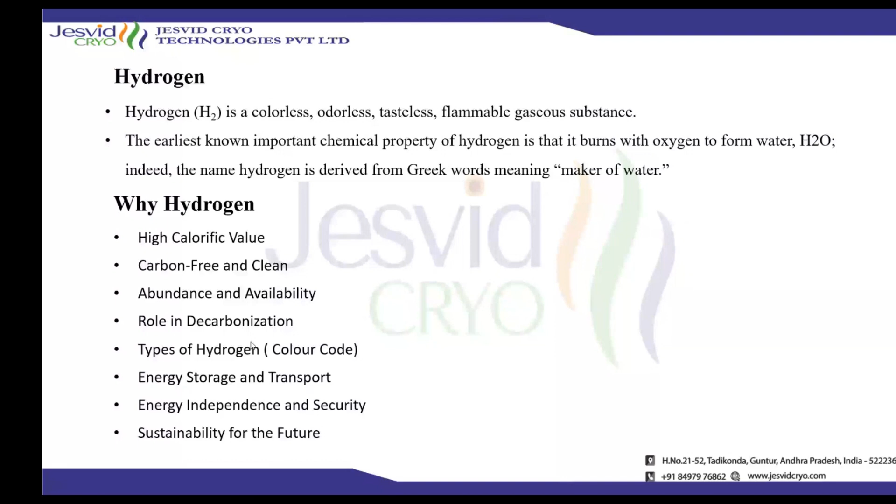If we see the applications of hydrogen, we all think hydrogen is used only in the transportation sector or some refineries. But various sectors and industries are using hydrogen, mainly the refineries. Refineries were once the largest producers of hydrogen, but now due to the decarbonization motive, they are the largest consumers of hydrogen for decarbonizing their products.

And in the refineries, mainly oil refineries, we are using hydrogen for desulfurization or denitrogenation, where hydrogen is mixed with the sulfur and this is separated. Only the pure petroleum gases are produced.

And in chemical industries, we are generating ammonia. As per the records, in the next 30 years, ammonia consumption is going to increase 40%. At present, 1.8% of carbon is being generated from ammonia. So here, using the Haber-Bosch process, hydrogen can be mixed with nitrogen, which is generated using air separation, to reduce the carbon. So hydrogen along with nitrogen gives ammonia, which does not generate any carbon.

Next, the steel industry. Making steel requires high temperature, and this high temperature is obtained by using coal. Burning the coal gives the high temperature which makes the steel, but the steel making process also releases carbon. So if we replace the coal with hydrogen, the high temperature is achieved, as hydrogen has a higher calorific value, and also there is no carbon.

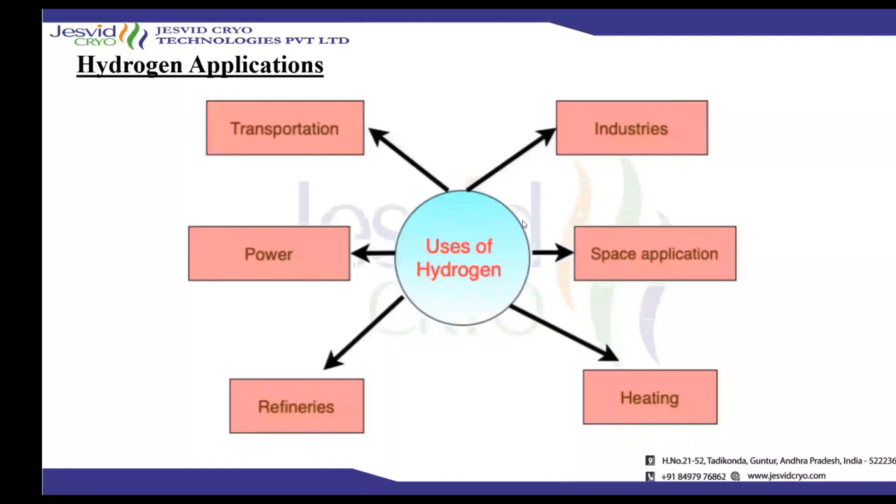If you see the supply and demand of hydrogen, 90 metric tons of hydrogen is the global demand across all areas. This hydrogen is produced from different sources such as natural gas, coal, fossil fuels, oils, and other byproducts. Here, 59% is produced from natural gas. This is not actually green hydrogen; it is produced from natural gas, which has carbon content.

Likewise, 19% from coal, 0.7% from fossil fuels, 0.6% from oils, and 21% from H2 byproducts. The hydrogen produced from natural gas or coal has some byproducts, and these byproducts also contain hydrogen, which comes to around 21%. So this is the supply of the 90 metric tons of global demand from fossil fuels and renewable energy sources.

Of this 90 metric tons, 37.18 metric tons is used purely in the refineries. 59% of hydrogen comes mostly from natural gas, and 37.18 metric tons goes to the refineries for the hydrodesulfurization process and various processes to reduce carbon emissions. In the other industries, as I mentioned, chemical and iron industries, 46 metric tons of hydrogen is used in the chemical industries: 75% for ammonia synthesis and 25% for methanol production.

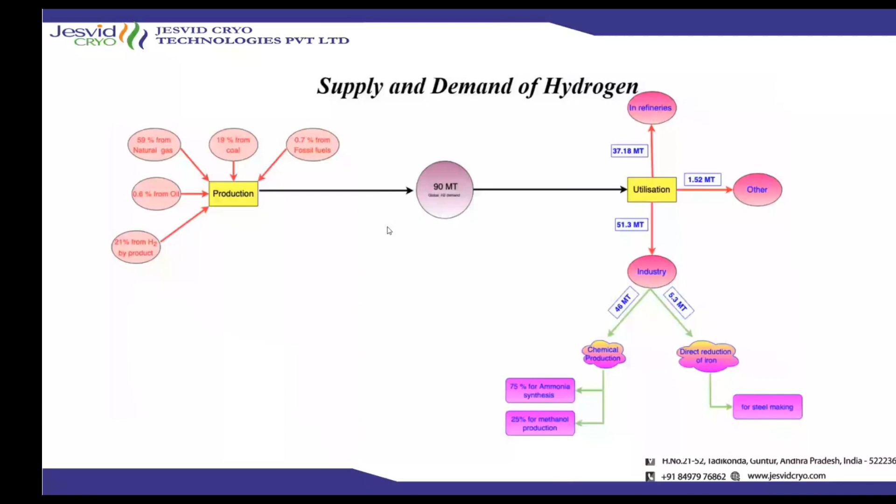Along with this, it is also consumed in the steel making process, where 5.3 metric tons of hydrogen is used in steel making, and the remaining 1.52 metric tons is used in other areas, such as transportation and other things. So we can see here the total supply and demand of hydrogen.

In the earlier slide, we saw that hydrogen is generated from natural gas, oil, and coal in these percentages. But how have the production methods been categorized? They are categorized in different ways; let us see the processes. Reforming, partial oxidation, and autothermal reforming are some of the processes listed here which generate hydrogen. If you read this slide, hydrogen generated using the reforming process has a feedstock of natural gas, and that feedstock source is fossil fuels. So this is the way we categorize hydrogen production methods.

Hydrogen production methods can be categorized by the source of the feedstock, the type of the feedstock, and the process implemented to generate hydrogen. There are different methods based on thermodynamics, like whether you are giving energy or taking out energy to generate hydrogen. And if you are using a catalyst to make the reaction happen, there are two types of reactions: catalytic and non-catalytic. Another way to categorize hydrogen production methods is the oxidants.

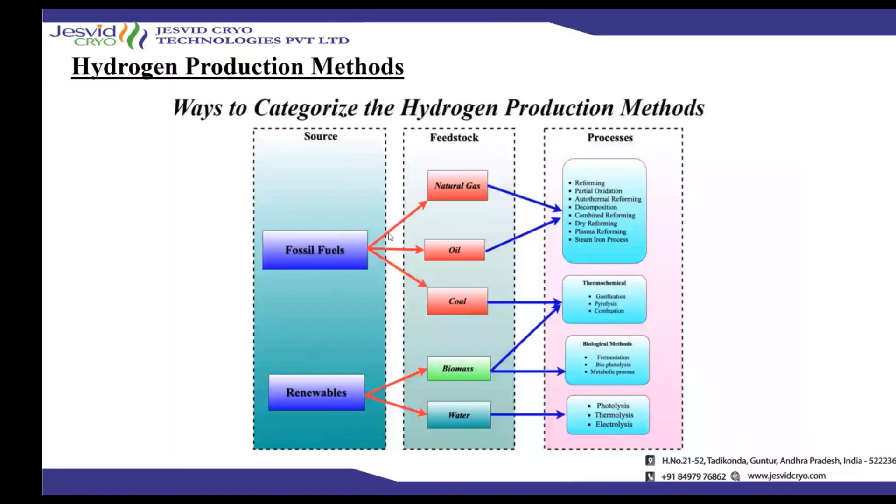So as I mentioned, the type of hydrogen color, here is the hydrogen color wheel. If we compare this hydrogen color wheel from earlier to now, it is going to increase. As we are very much interested in green hydrogen, we can start with green hydrogen. The green color indicates that you are generating hydrogen using water electrolysis along with a renewable source of electricity. That means you are using renewable electricity to split the water into hydrogen and oxygen, then the generated hydrogen is called green hydrogen.

And if you are using any renewable energy such as solar power or wind power, that can be green hydrogen. And if you are restricting only specifically to solar power to split water into hydrogen and oxygen, then this is called yellow hydrogen. And if you are using nuclear power to split water into hydrogen and oxygen, then that can be called red, pink, or purple.

For example, if you are using a nuclear power plant to generate electricity, and that electricity is used to split the water, then it is called pink hydrogen. If you are using direct nuclear power to split the water, then it is called red hydrogen.

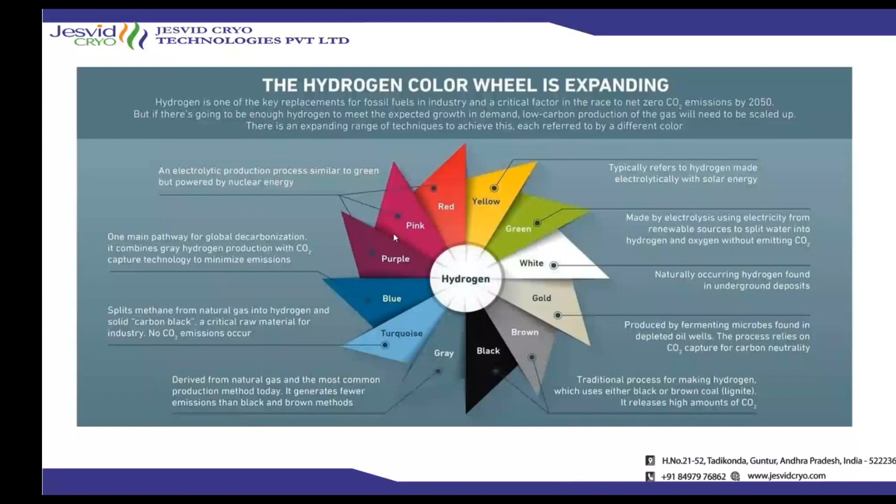So we have studied the hydrogen color spectrum and the different hydrogen production sources, and we know that during production of hydrogen, carbon is emitted. So here there is a comparison of the energy consumption, hydrogen yield, and emissions while generating hydrogen. If you see the feedstock, I have taken natural gas, oil products, coal, and water as the feedstocks.

If I want to generate hydrogen using natural gas, 1 mole of hydrogen requires 42 kilojoules of energy. And if you are giving 1 mole of feed, it can generate 4 moles of H2 using natural gas as a feed. If you are generating 4 moles of H2 giving 1 mole feed of natural gas, you are generating 10 tons of CO2 per 1 ton of H2. So if you are generating 1 ton of H2 with natural gas as a feedstock, you are generating 10 tons of CO2. So this is a major comparison.

We have already seen that the major hydrogen production is done using natural gas. So here the carbon dioxide released to the atmosphere is high. So we are shifting towards carbon neutral environments, so we are preferring the water electrolysis technologies.

Now for the oil products, the energy consumption is 50 kilojoules per mole. So to generate hydrogen, we require 50 kilojoules per mole of energy for an oil product as a feedstock. And with 1 mole of oil product as a feed, we are able to generate 2.7 moles of H2. And if you are generating 1 ton of H2 using oil products, you are releasing 12 tons of CO2, which is higher than natural gas.

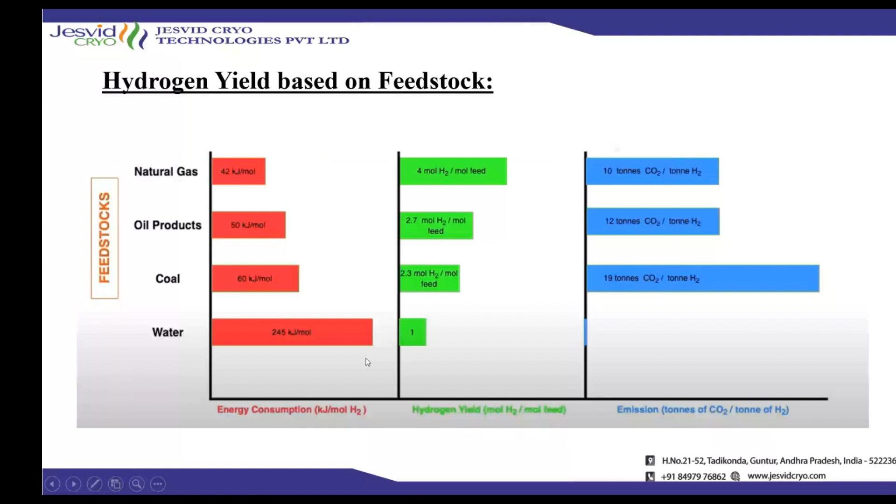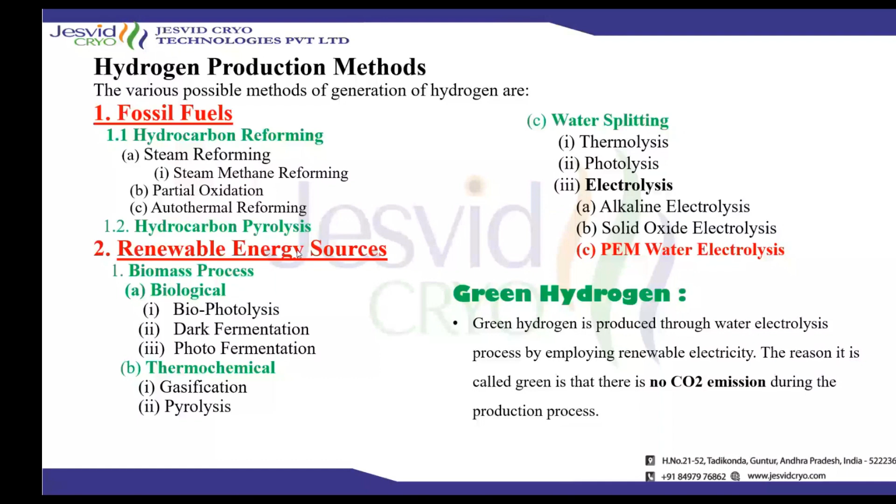Okay. So here we have seen different hydrogen production methods. From here, we'll go into detail of each and every method. Just briefly, I'll explain all these methods. If you are able to generate hydrogen using fossil fuels, we have seen the steam methane reforming. In steam methane reforming, there is a methane reactor, water gas shift reactor, and H2 purification. So here, the hydrogen is generated from methane.

Methane is reacted along with steam, that is water, at the methane reactor stage, where you can see the equation CH4 plus H2O gives rise to 3H2 plus CO. Here the generated hydrogen is collected and sent for purification, and the CO goes to the water gas shift reactor, where some more hydrogen is generated along with water, and CO2 is given as a byproduct. The generated hydrogen also goes to the H2 purification. So this is a basic introduction of steam methane reforming.

If you see this process, there is a pre-treatment of the feed, that is hydrodesulfurization will be done, and all the impurities from this methane are removed before sending it to the reactor, and the pre-processing of the methane will be done before sending it into the methane reactor. And after generating the hydrogen, post-processing work is also done for the purification of the hydrogen to meet the end application requirements.

So if you see the partial oxidation method, this partial oxidation method is of two types: a catalytic method and a non-catalytic method. We can use catalytic and non-catalytic for generation of hydrogen using this partial oxidation method. This partial oxidation method is similar to steam methane reforming, but here only oxygen is being induced into the reactor, not the steam.

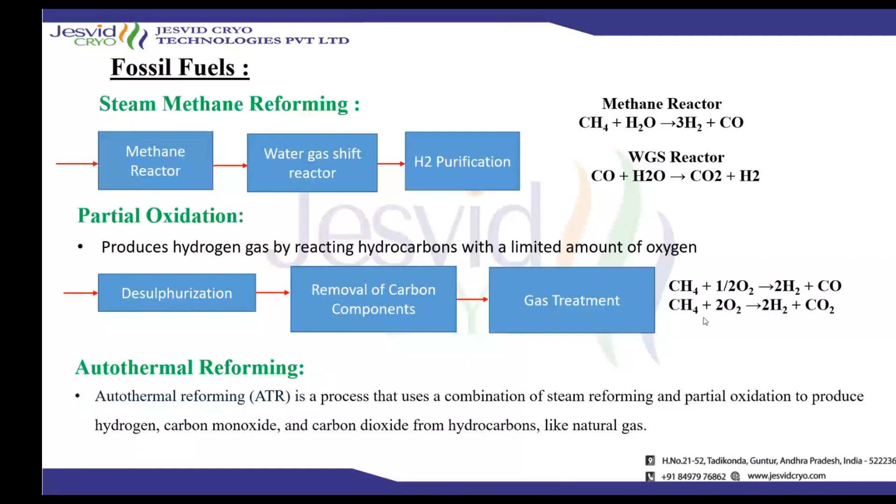Then, the next is autothermal reforming. Autothermal reforming is a process that uses steam methane reforming and partial oxidation to generate hydrogen. So here, some amount of oxygen and some amount of steam is added in the reactor along with the methane to produce the hydrogen. This is the most effective compared to partial oxidation and steam methane reforming. But steam methane reforming is extensively available and currently used in the industries.

This is a biological hydrogen production process, where there are different biological production processes such as fermentation, biophotolysis, and bioelectrochemical systems. In the fermentation process, there is dark fermentation and photofermentation. All this biological hydrogen production is done using organisms or bacteria. There are different bacteria responsible for the generation of hydrogen. In dark fermentation, the feed is fermented, and mesophiles and thermophiles form hydrogen from that feed. And in photofermentation, there are two different organisms, sulfur and non-sulfur organisms, which form the hydrogen. In direct biophotolysis, algae and cyanobacteria are used to form the hydrogen.

In direct photolysis, light energy is directly used to split water into hydrogen and oxygen. In indirect photolysis, the same bacteria are used, but hydrogen and oxygen are not split directly; carbon compounds are formed, and then from these the hydrogen is generated. Then if you see the microbial electrolysis cell, here exoelectrogens are the organisms which cause the feed to generate hydrogen. But these biological hydrogen production processes have low production, and they don't meet the requirement. So these are not used widely. They are under the experimental stage. So here the hydrogen production is done using organisms.

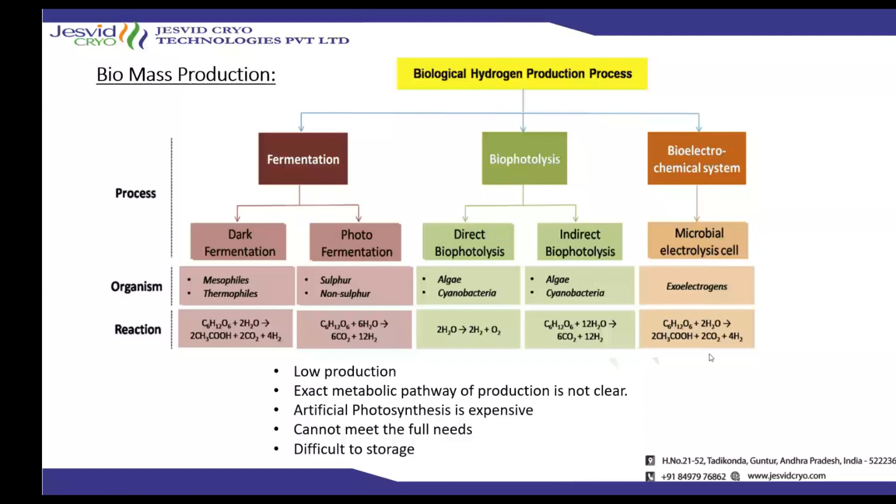And now if you see the thermochemical methods, there are two types: thermochemical gasification and thermochemical pyrolysis. These two methods use the same feedstock, which will generate syngas. In that syngas, hydrogen along with other components will be present, but the hydrogen is separated using different separation technologies.

In the gasification method, it takes place at high temperatures, more than 700 degrees centigrade. Here it converts organic or fossil based fuels into carbonaceous materials. In gasification, the main change is we are adding oxygen or steam for this reaction to happen. So we are adding the oxygen and steam and giving this feed, leaving carbon monoxide and hydrogen as end products.

So the generated hydrogen, carbon monoxide, carbon dioxide will need to be separated or adsorbed in different reactions to generate this hydrogen output. Pyrolysis is the same kind of process as gasification, but it is done in the absence of oxygen. In gasification, a controlled amount of oxygen is injected into the reactor, but in pyrolysis, the reaction takes place in the absence of oxygen.

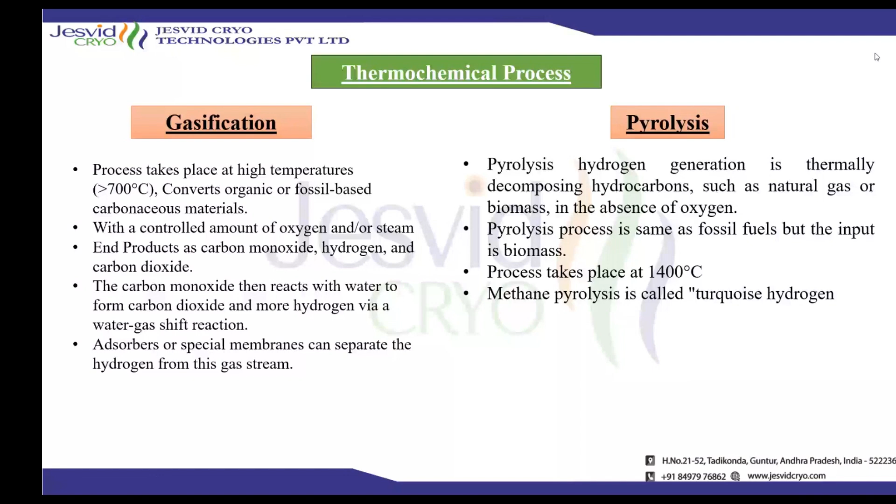And in pyrolysis, as there is no oxygen, it will take place at 1400 degrees centigrade. So if you are using pyrolysis and are able to generate hydrogen giving methane as a feed, then this is called turquoise hydrogen.

Here we can see the typical flow diagram of a gasification process. This is one example I have shown here for a clear understanding of the gasification process. There is a thermolyzer where the feed is present. In this thermolyzer, we are introducing the feed from this hopper. So this is the reformer where this feed is present. Like this, we are giving the feed.

Here, it consists of two jackets, an inner jacket and an outer jacket. From here, the feed goes in. We are raising the temperature above 700 degrees centigrade, and we are adding some process steam and gas of H2 and N2. The feed goes here, the gasification is done at this place, and thermogas is released, leaving ash and tar as byproducts. But this process is intended to reduce or remove the tar formation, which gives us more efficiency.

From here, the thermogas is taken to the gas reformer. Before that gas reformer, we again inject some more H2O so that the concentration of hydrogen will be increased. In the reformer, it goes from 700 degrees centigrade down to 400 degrees centigrade for the reforming stage. At this reformer, the thermogas is converted to syngas. The syngas goes to the same reformer for heating; the feed comes in the inner jacket, and the syngas comes to the outer jacket for heating the feed initially.

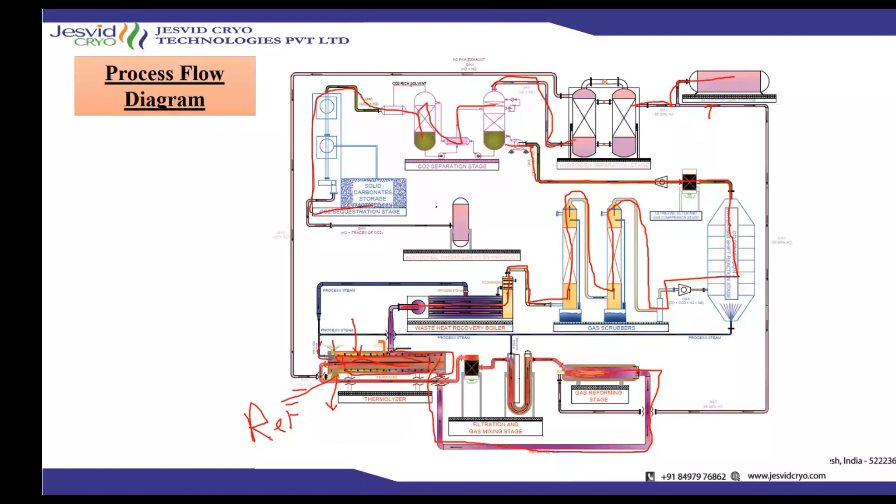And here, if you see, we give the feed at this place, and we are able to generate hydrogen and store pure hydrogen of 99.99%. But in between, we are generating carbon also, and this carbon is separated at this stage and stored in solid form. This is a solid carbonate storage. So here we are not causing any environmental impact from greenhouse gases. So this is a typical block flow diagram of a thermochemical gasification method.

And if you see the water splitting technologies, there is a thermolysis method of generating hydrogen, which is due to the increase of the temperature; up to 1400 degrees centigrade, we are able to generate hydrogen. So H2O, we are supplying heat to this water, and we are generating hydrogen and some O2.

And photolysis: here photocatalysts are used to transmit visible light. So the light source is transmitted onto the water to generate hydrogen and oxygen.

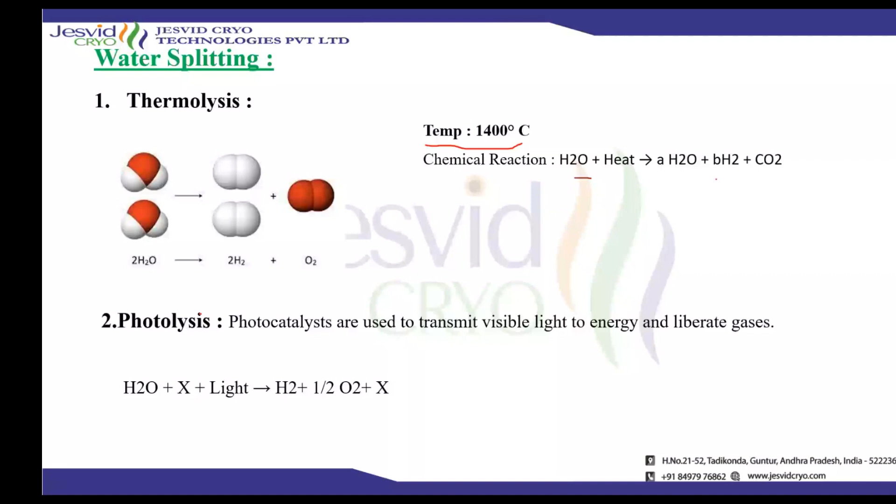Now here comes the electrolysis procedure for generation of hydrogen. We all know that electrolysis is the process of decomposition of water into hydrogen and oxygen when electric current is passed through the water. In its basic form, the electrolyzer consists of a cathode, a negative charge, and an anode,

a positive charge. In the very basic experiment of hydrogen that we all know, we take a beaker, pour some water, keep two rods called electrodes, and supply some electric power. We think the water will be split into hydrogen and oxygen, but it doesn't happen, because water itself cannot split; the water needs to be either acidic or basic to split into hydrogen and oxygen. So we make this water acidic or basic in nature.

So this is a basic experiment which we perform at a very low level for the splitting of water. And this is the main principle of water electrolysis, which is intended to be further refined for effective hydrogen and oxygen collection from the water. The entire cell consists of two electrodes, the cathode and anode, an enclosing member, which we call a beaker, and an electrolyte or water.

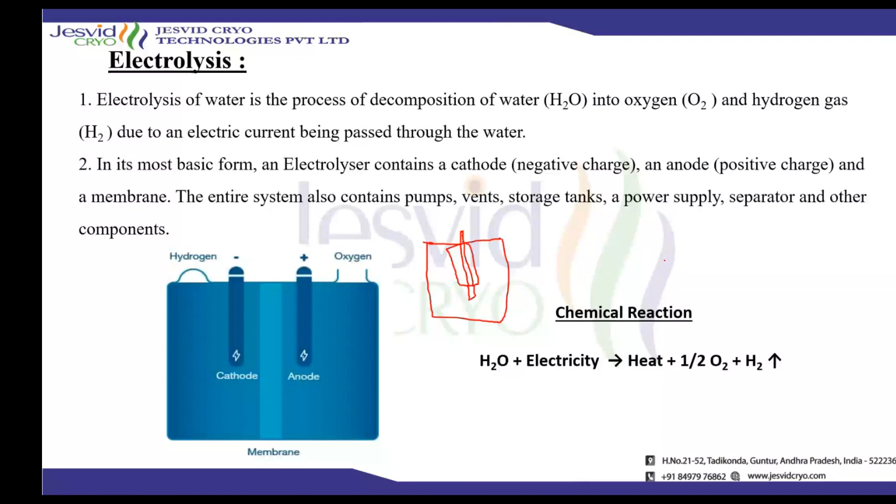So as I have mentioned, water is required for the generation of hydrogen. Ideally we require 9 liters of water for 1 kg of hydrogen generation. But considering all the losses, we require nearly 11 liters of water to generate 1 kg of hydrogen. And the energy consumption, because we need to provide the electric energy to split this water into hydrogen and oxygen, we require 39.4 kilowatt hour per 1 kg of hydrogen generation.

But considering the different losses like ohmic losses, activation overpotential losses, and mass transportation losses, the actual energy required will be varying from 50 to 56 kilowatt hour per kg of H2, and this may increase more based on the different electrolyzer technologies. Due to their inefficiencies and due to their advancements, this value will also vary.

And the water treatment, if we see, the water needs to be as per the ASTM type 2. The required water for the hydrogen should consist of total organic carbon of 50 ppb and less than 5 of sodium and chloride content. So this is the type of water required for the hydrogen production. To produce these specifications of water, normal water needs to be purified, and this purification also requires some energy consumption, which will impact the total cost of the hydrogen generation.

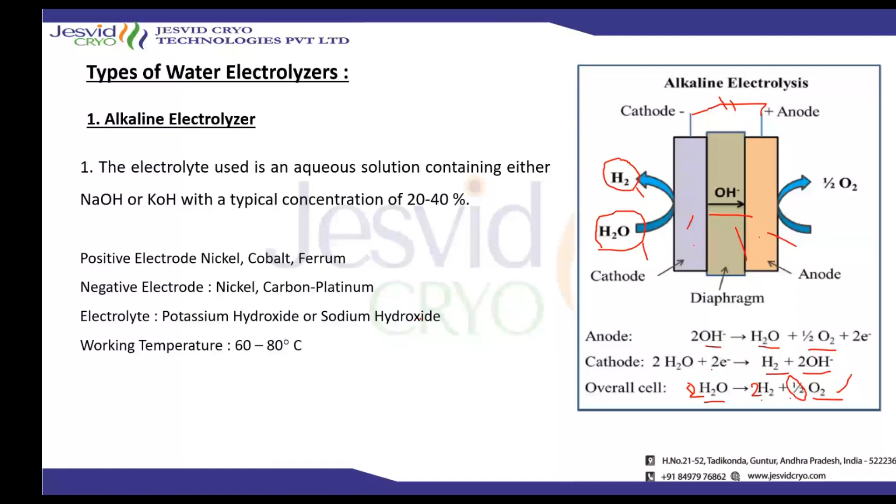So if you go for a solid oxide electrolyzer, it is a high temperature electrolyzer. It is categorized as a high temperature electrolyzer because it uses steam as an input and works at 500 to 850 degrees centigrade.

So here in the solid oxide electrolyzer, the reaction starts at the cathode as mentioned in the alkaline electrolyzer. So you can see H2O plus 2e minus gives H2 and O2 minus, and this O2 minus is being transferred from cathode to anode. Whereas in the alkaline electrolyzer, OH minus is being transferred from cathode to anode, but here O2 minus is being transferred from cathode to anode, where it is reacted to form oxygen.

So the anode material here is LSM, that is lanthanum strontium manganite, and the cathode is nickel doped yttria stabilized zirconia. So these are the materials used. As this is a high temperature electrolyzer, the ceramic materials are mostly preferred for this electrolyzer to resist the temperature. And the membrane used here is the yttria stabilized zirconia membrane, which will allow the oxide ions to move from cathode to anode.

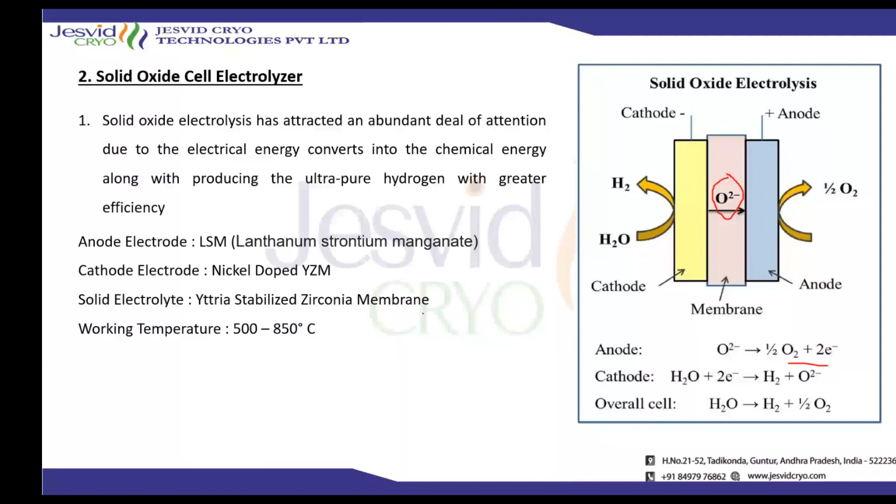And coming to the PEM water electrolyzer, the PEM electrolyzer is called a proton exchange membrane electrolyzer or solid polymer electrolyte membrane electrolyzer. In this PEM electrolyzer, there is no requirement of adding any potassium or sodium electrolyte into the water. In the PEM electrolyzer, the water is sent to the anode. Here, water is split into protons and oxygen is generated.

The 2 electrons are released and transferred from anode to the cathode. The electrons travel from anode to cathode, and the protons generated at the anode side are transferred from anode to cathode through this PFSA membrane, that is the PEM, the proton exchange membrane. Here in the cathode, these protons from the anode side and the electrons combine to form hydrogen. And if you see the overall cell reaction, water gives rise to H2 and half O2.

If I balance this reaction, it becomes 2H2O gives 2H2 and O2, with no half. This membrane is of different kinds. As I mentioned, I will go deep into this PEM water electrolyzer: the working principle, the materials, the construction, and the BOP, the balance of plant, for efficient working of a PEM electrolyzer. The membrane used here is a solid electrolyte membrane, such as Nafion, Fumapem, and other companies provide these membranes.

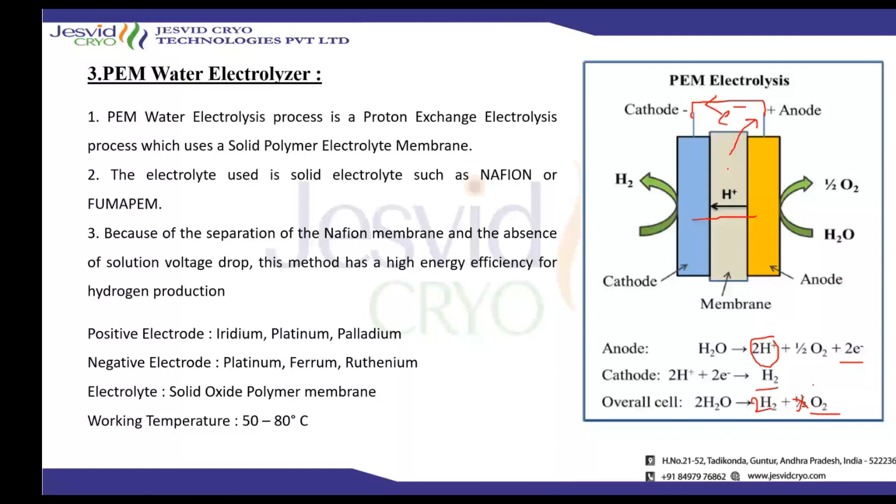This is a typical comparison between the PEM electrolyzer and the alkaline electrolyzer. As the alkaline electrolyzer is an existing technology, there are more advancements in it which give high efficiency compared to the PEM electrolyzer. Alkaline electrolyzers take more time for the initial start, and PEM electrolyzers take very little time. For large production of hydrogen we go with alkaline electrolyzers, and for small and intermediate capacities the PEM electrolyzer is preferred.

For the cell temperature, PEM electrolyzers operate at 50 to 80 degrees centigrade, and alkaline electrolyzers operate at 60 to 80 degrees centigrade. These are the normal commercially available operating temperatures; beyond this electrolyzers may operate, but those are in the laboratory or experimental stage. For rated production, PEM electrolysis is used for 0.265 to 30 Nm³ per hour, and alkaline for 1 to 760 Nm³ per hour.

But now the production capacity has increased very much. The rated power is 1.8 to 174. The required kilowatt power to generate 1 Nm³ or 1 kg of hydrogen is given here, but these are not updated; the ranges have been very much reduced. The specific energy consumption in the PEM electrolyzer is 5.8 to 7.3 kilowatt hours per Nm³ of gas, and in the alkaline electrolyzer it is 4.5 to 7.5 kilowatt hours per Nm³ of gas.

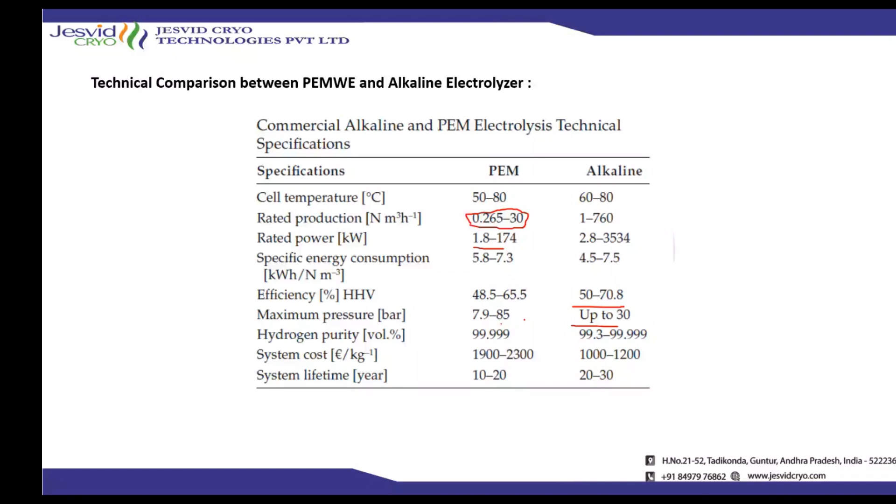So this is the construction of a PEM electrolyzer. The PEM electrolyzer consists of bipolar plates, gas diffusion layer, and a membrane electrode assembly. In this, as I mentioned in this equation, at the anode side, water is being fed into this electrolyzer. From there,

at the anode side, water is being fed into this electrode, and here the water is coming out, where the protons H+ are migrating from the anode side to the cathode side. So there is a DC power supply. From here the electrons are traveling to this side, and these electrons combine with protons to generate hydrogen at the cathode side. To make this phenomenon happen, it requires different parts called cell components for the efficient generation of hydrogen and the efficient collection of generated hydrogen.

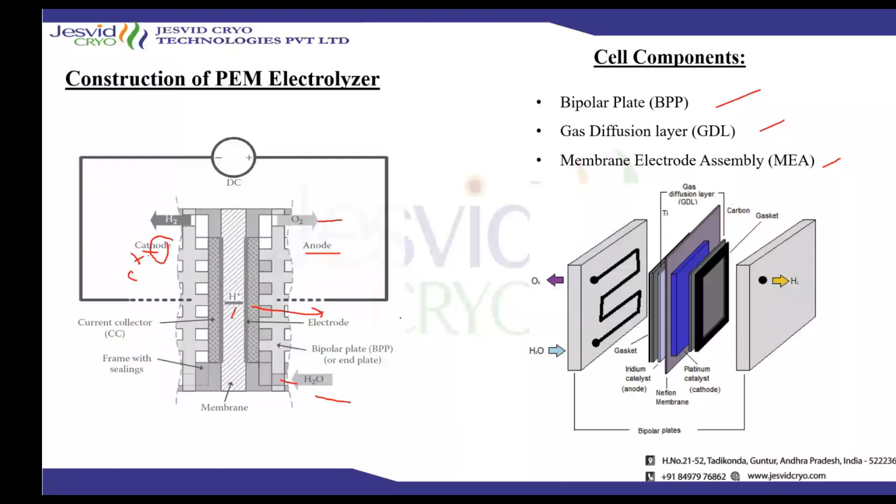So these are the different parts as I mentioned here. The water is coming in at this area. It is going through a bipolar plate which consists of a flow channel, where it has some space and time for the reaction with this catalyst at the anode. Then the generated oxygen is taken out from this bipolar plate. The protons migrate from here to the cathode side, and it consists of another bipolar plate where the generated hydrogen is taken out from here.

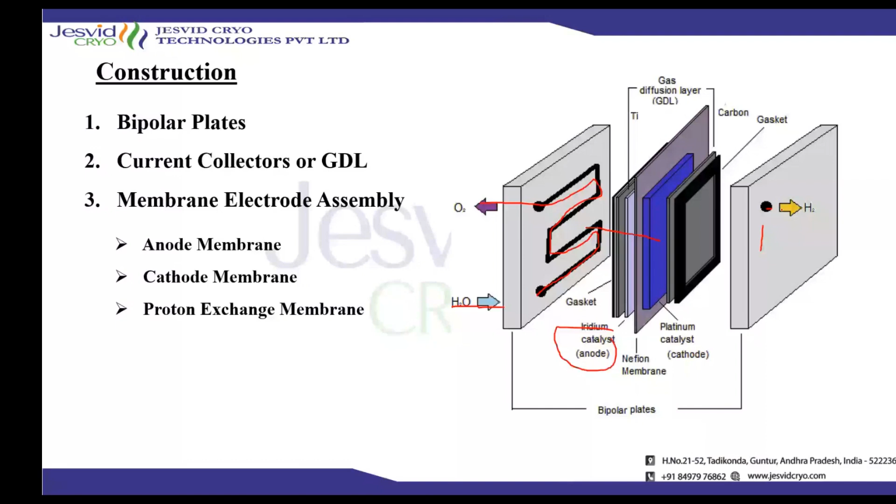These are the materials used for the PEM electrolyzer. So as I mentioned, noble platinum materials are used for hydrogen evolution at the hydrogen side, and the oxygen side likewise. The hydrogen generation at the cathode side is called the hydrogen evolution reaction, and at the anode side it is called the oxygen evolution reaction. Platinum, iridium, ruthenium are some of the materials used for the oxygen evolution reaction at the anode. So these are the noble catalyst materials.

And if you see at the cathode side, platinum, platinum black, carbon platinum are used for this hydrogen evolution reaction at the cathode side. Now if you see, there is a membrane in between this anode and cathode which allows only the proton. So this membrane is called a polymer electrolyte membrane, which is coming from Nafion, Fumapem, Flemion, and other companies. These are providing these PFSA membranes. These PFSA membranes are perfluorosulfonic acid membranes, which allow only protons from the anode side to the cathode side.

And the other components which I have mentioned are bipolar plates, gas diffusion layers and the current collectors. So titanium is used as a material for the bipolar plates, and carbon paper is used as a gas diffusion layer at the cathode side, and a metallic gas diffusion layer is used at the anode side. So this is the membrane electrode assembly, which consists of a membrane, with anode and cathode on either side of the membrane. As I explained about the membrane, now

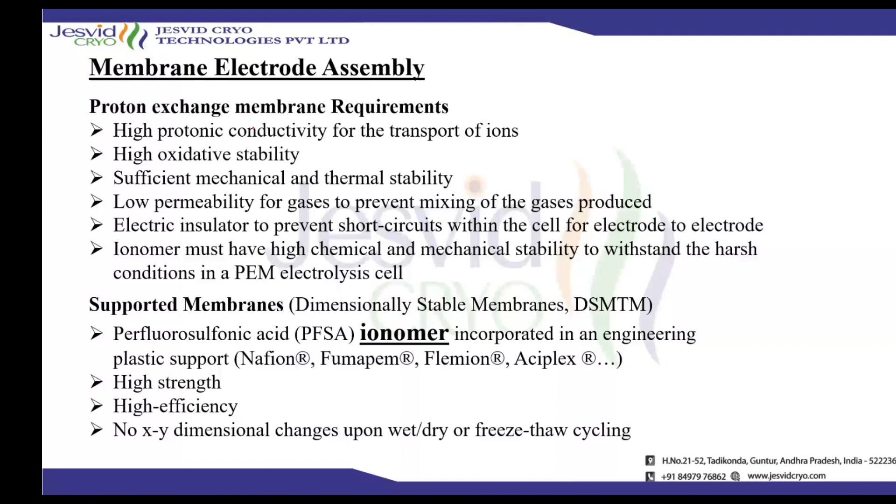And if you see the bipolar plates, these are also called cell separators, which have a fluid flow channel on either side. These channels allow the water to pass to the cell, which gives time for the water to react with the electrodes on either side of the membrane. So the requirements of the bipolar plates: it should have high bulk electrical conductivity, and the bipolar plate will have two gases on either side, that is H2 and O2 compartments, because on one side hydrogen will be there and on the other side oxygen will be present.

It should facilitate the efficient movement of the water in these channels, and it should perform gas evacuation. It should efficiently send the water from the source to the anode or the cathode, whichever is required. And this bipolar plate is common for all electrolyzers, not only PEM electrolyzers.

So if you are using this bipolar plate and sending water through the flow channel, it should efficiently send the water to the electrode for the reaction. And after the gas is generated, it should efficiently bring the gases out. Means the gases need to be evacuated. And it should be highly electrically conductive, and it should have high surface conductivity.

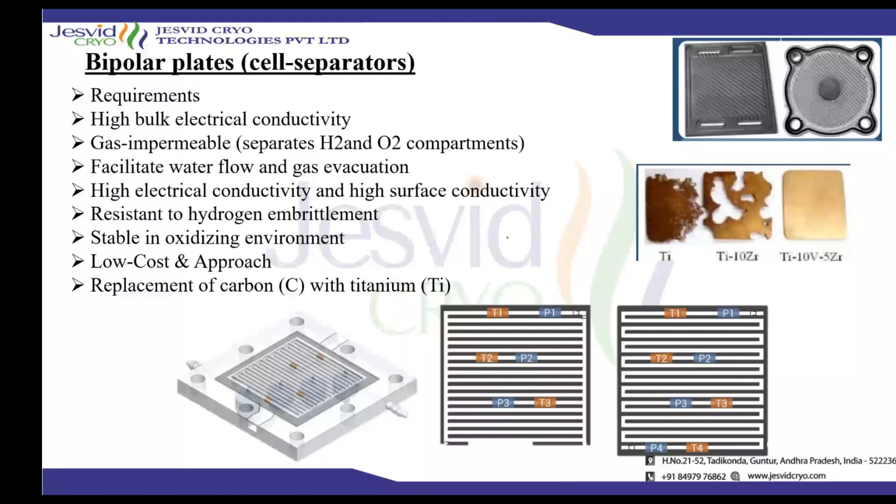And these are the gas diffusion layers, also called current collectors, which are placed on both the anode side and the cathode side, because these diffuse the generated gas at the surface of the electrodes and take this gas out from the electrode to the bipolar plate. The major gas diffusion layers used in PEM electrolyzers are porous sintered titanium, for the efficient movement of hydrogen, oxygen and water between the bipolar plates and the electrodes.

So this is an electrolyzer stack. This is one cell, this is another cell and this is one cell. Here it is a combination of 3 cells, and this is the membrane, this is the anode and this is the cathode. We are providing the water at the anode side here, and at the anode the reaction takes place and oxygen is generated. The generated oxygen is taken out from here.

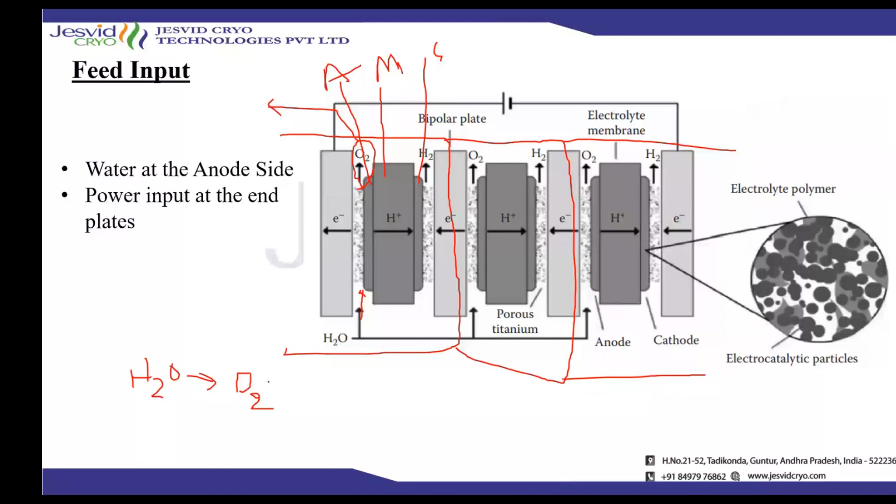As we see, our reaction is 2H2O, so here oxygen is generated, and 4 electrons are also generated. This generated oxygen needs to be taken out. So this is the reaction taking place at this area. From here, the protons travel from the anode side to the cathode side. Here they react with the electrons, and the hydrogen is generated.

So in this bipolar plate, on this side the water is supplied, and here the hydrogen is present. And on this side we are providing water again. Means this bipolar plate has hydrogen on one side and water supplied on the other side. This image shows the efficient working and makes clear both sides of a bipolar plate.

If you are going to stack cells, means if you are able to generate some amount of energy from one cell and you want to generate more, we make different cells and stack them. This is called an electrolyzer stack. The generated hydrogen from each cell is collected. For example, if you generate 0.5 kg of hydrogen from one cell, and another 0.5 kg from the next, and here 3 cells are there, it means you can generate 1.5 kg of hydrogen from this total stack.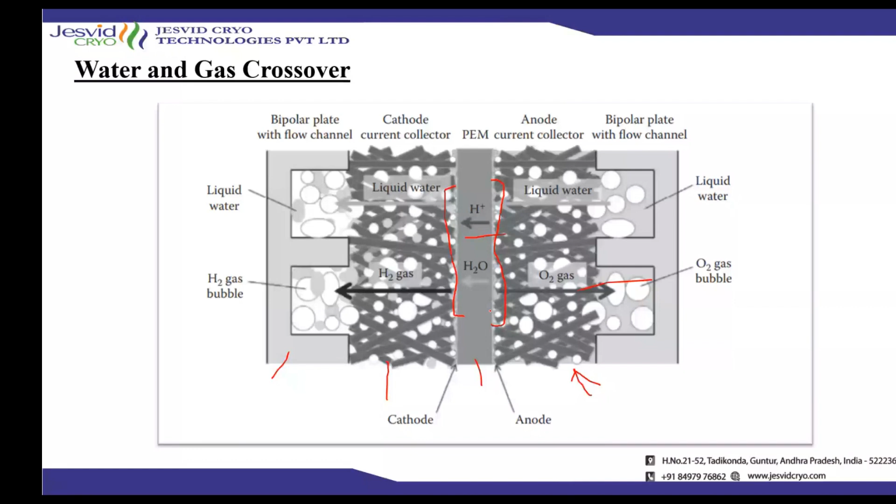See, this is the bipolar plate, this is the current collector, and this is the membrane. Here the electrodes are present, and the reaction takes place at this side. Here we introduce the water and take out the oxygen, from here the protons move, and here the hydrogen is generated. If you see this image, as I mentioned, there are some impurities in the working of this electrolyzer. These are the water and gas crossovers.

So here there is a movement of water from the oxygen side to the hydrogen side, that is from anode side to cathode side, and there are some traces of oxygen present in the generated hydrogen due to the movement of oxygen from the anode side to the cathode side. These are called the mass transfer losses. So for the working of this cell there are different losses: the mass transfer loss, and ohmic losses are also present, because we are supplying electricity for splitting this water into hydrogen and oxygen. There are some losses in the power also.

So in the initial stage we are sending water and generating oxygen, and hydrogen we are collecting here. In the next stage, some water is also transferred to the cathode side. This is called water drag. And due to diffusion, oxygen moves from the anode side to the cathode side. So in the generated hydrogen there are different impurities due to these mass transfer losses.

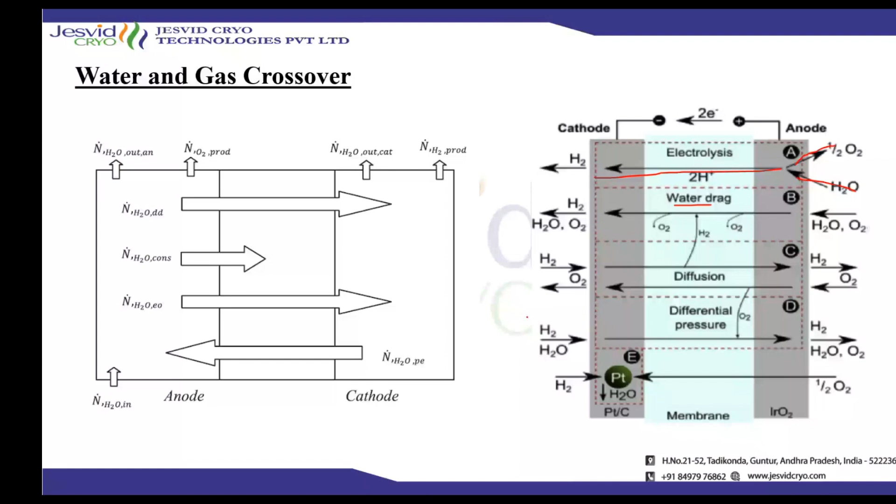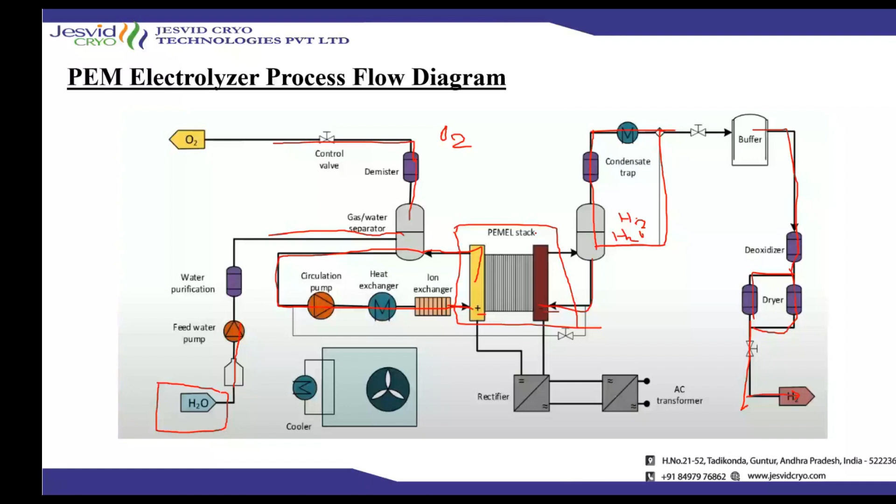So in this webinar, we have seen the different hydrogen production methods, the different applications of hydrogen, where it is widely used, and different production methods based on different sources of feedstock. We have seen the water electrolyzer technologies, where hydrogen is generated without any production of carbon dioxide. And we have studied the working and construction of a PEM electrolyzer, and the balance of plant for the PEM electrolyzer.

So we know that there are many options for considering hydrogen as a very good fuel, but hydrogen storage is a critical issue, and we need to implement more methods for the effective storage and transportation of hydrogen. From this generation, we can store this hydrogen and transport it for our other purposes.